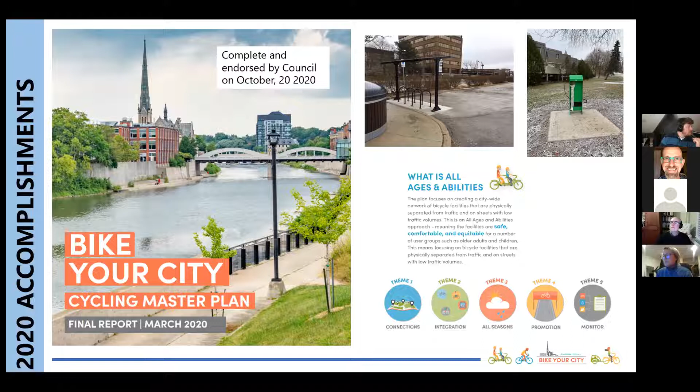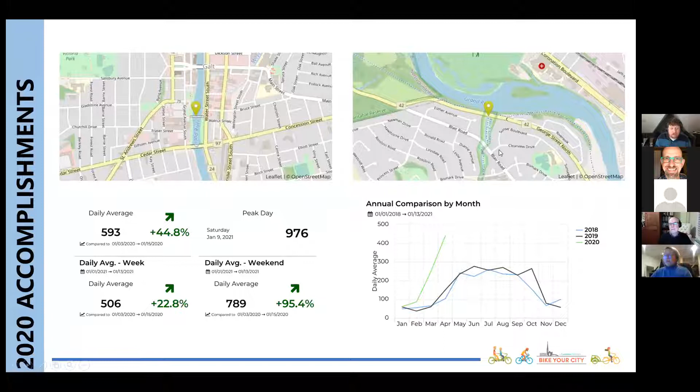And then along one of our trails that goes near the Blair area, this experienced a 400% increase, which is quite huge. And I'll hand it to Shane for this one.

Yeah, so I chose to highlight a couple of projects that deal with maintenance and safety issues we've had ongoing for a number of years. These are two trails that are heavily used in our network by both pedestrians and cyclists.

The top one here, the 401 underpass, is on the Mill Run Trail. It runs between the north end of the city in Hespeler and through to the Preston area in Riverside Park. It's a great trail - if you haven't used it, it's phenomenal. A number of years ago, Highway 401 was expanded and the section of trail was closed for a long time. We previously had a boardwalk through here, so anyone using this space would have to slow down, get off their bike and walk through.

When MTO widened the highway, they paved a little section underneath the 401, but of course you want to take it a lot faster now. So we had a real issue with this one. On bright sunny days, if you're coming along on your bike or running, getting underneath the overpass it's pitch black - you can't see anything, you're blind for a moment. We felt that was quite a safety issue.

So we looked at a few different options. We looked at putting lights under the bridge, but the MTO wasn't interested in paying for the electricity for that. Then we looked at whether we could put up some solar lights, but the problem is the worst darkness was actually in the middle of the day, so there's no chance for solar lights to charge their batteries. We were sort of out of options with that one.

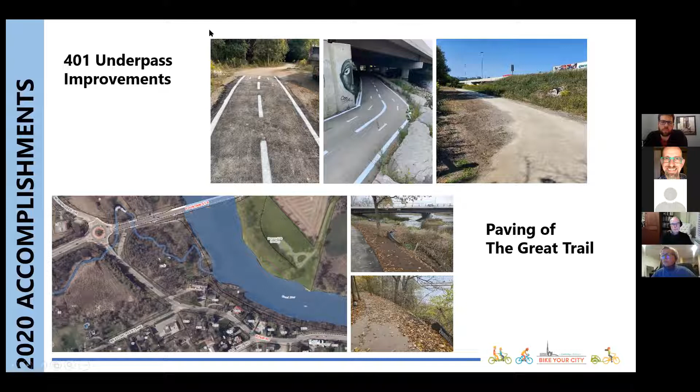Sorry, I lost myself there.

Phase one will be from Concession to Industrial, which we'll construct, and phase two is the section right after. Another trail we'll be working on is one in Hespeler.

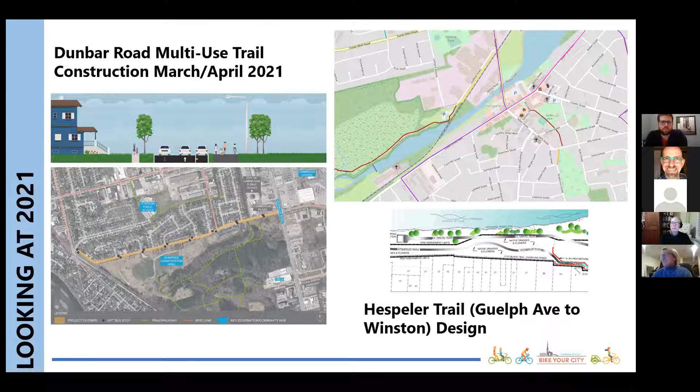This runs along Guelph Ave, behind through here along the river, then pops onto the road here, the Boulevard Multi-Use Trail, and ends on Winston Boulevard. The design work just started last week, we just had the kickoff meeting. That will be a fun project to look forward to for 2021 construction, either late 2021 or 2022.

Looking beyond 2021, we just finished up our cycling master plan. It's really great that it laid the entire foundation out for us, giving us a 5-year action plan. There's quite a few things in there we plan on doing. For example, we're updating our bicycle parking guidelines right now to include some indoor bike parking, working on a bunch of wayfinding signs, and working on a tourism loop throughout the city. There's quite a lot of things in our cycling master plan that we'll try to work towards in the next 5 years.

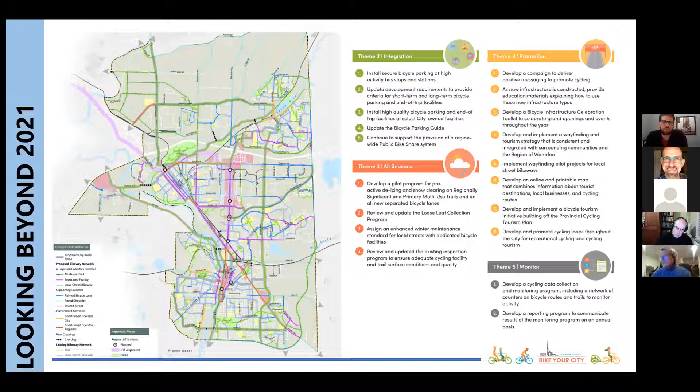It's amazing, with all this truck traffic and whatnot, you get into this space behind these industrial buildings and just feel like you're out of the city. There are raptors flying around, some wet areas down through there, lots of animals, deer and foxes and all kinds of stuff. It's just a fantastic little spot.

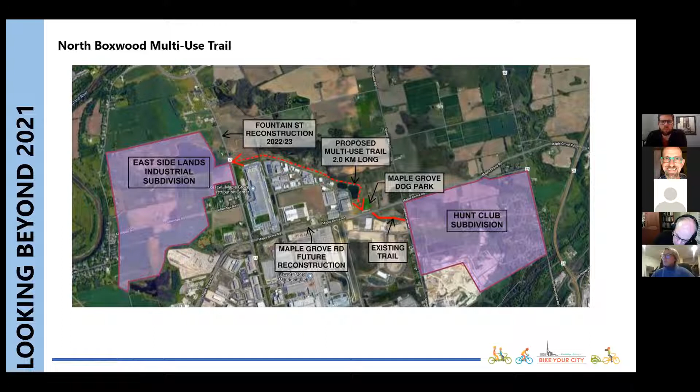We're looking at getting this planned this year, then starting construction next year, and hoping to tie in some pedestrian crossing points on Maple Grove and Fountain when the region does their road reconstructions as well. I'll move on to the next slide there, Lisa.

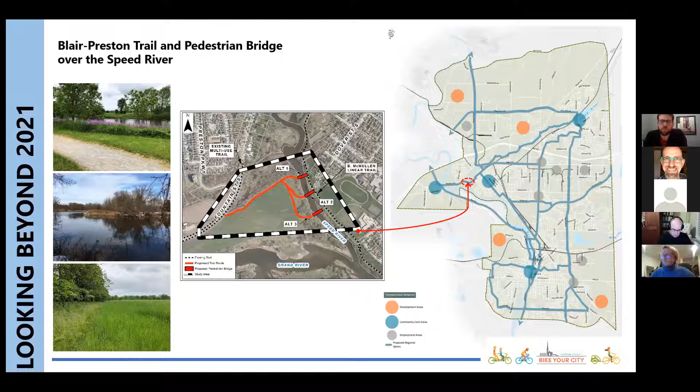That's the end of the— oh, sorry, I hit stop share by accident, but I didn't have anything else to add. That was the end of it.

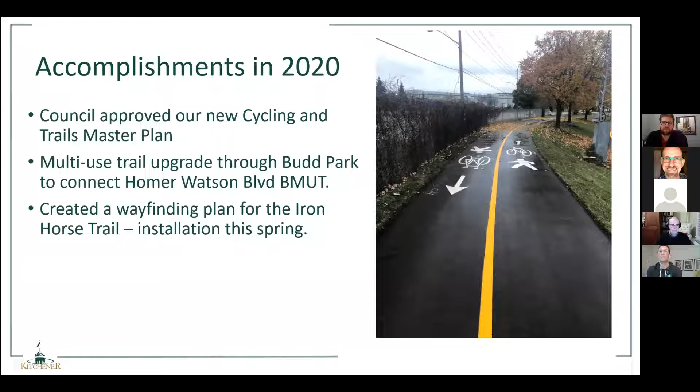So some of our accomplishments, I'm going to talk about off-road trails and Darren will talk about on-road. In 2020, our Cycling and Trails Master Plan was approved by Council. We created a new multi-use trail through Budd Park connecting the trail along Homer Watson, filling in that gap. And we created a wayfinding plan for the Iron Horse Trail, to be installed this spring.

Our Cycling and Trails Master Plan, we've been working on this for about 2 years now, and when COVID hit, it got put on hold with the rest of the world. So we finally got it approved, and I'll go through some of the highlights of that plan.

Some of our goals were to build more connections, to make the experience safe and high quality, and to create a culture of active living. Within that, we had 3 overarching themes: connections, experience, and culture. We broke the themes down into some strategies, which you can see on the screen and read more about on our website.

Connections focuses on connecting on-street cycling and off-street trails as a way of connecting neighborhoods, people, and destinations. We have the 3 C's: comfortable, connected, and complete. Comfortable focuses on developing our all ages and abilities network. Connected includes our City Spine network that provides a high quality, direct connection to major destinations like commercial areas, parks, and schools. The plan is complete by ensuring most residents of Kitchener are within a 400-meter designated cycling route or trail.

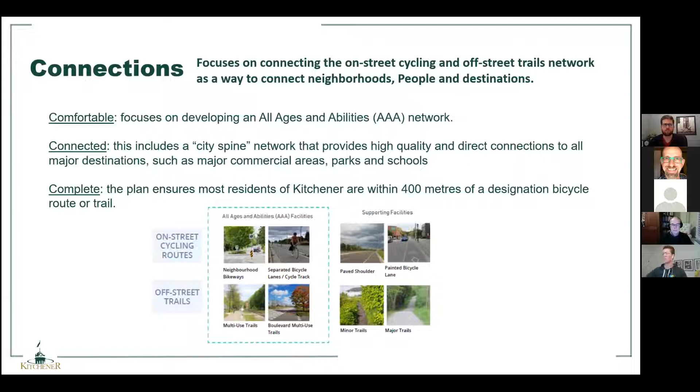Experience focuses on a safe and high quality experience that connects you through cycling routes and trails as stress-free and seamless as possible. This includes high quality bike parking, implementing service standards for maintenance and an inspection program, implementing the wayfinding strategy, continuing to update the network map, and ensuring new development elements are designed to accommodate walking, rolling, and cycling.

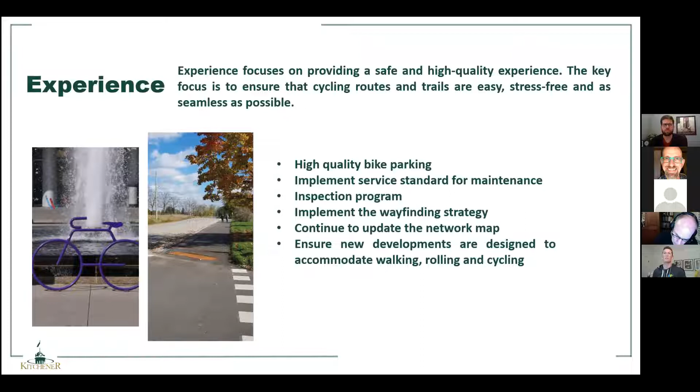Culture is about creating a culture of active living, through education and raising awareness for cycling routes and trails. We want to educate all road users on new cycling and trail infrastructure, encourage use of cycling routes and trails, and develop a data collection and monitoring program.

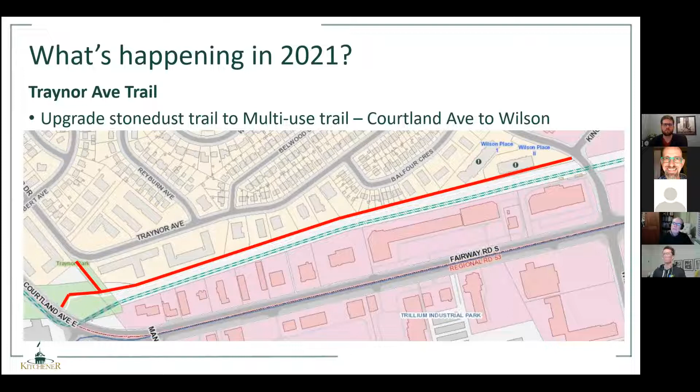So what's happening in 2021: we're going to upgrade the Traynor Ave Trail, which runs from Courtland to Wilson along the LRT tracks. We're upgrading the Stone Dust Trail to a multi-use trail with year-round maintenance. The Walter Bean Trail is currently designated as a hiking trail, and we're working with a consultant to fix it and upgrade it.

I can't tell you exactly what the surface will be since that's part of the design, but we're hoping it can withstand the ice flows that are damaging the trail right now. Construction is planned between 2022 and 2024.

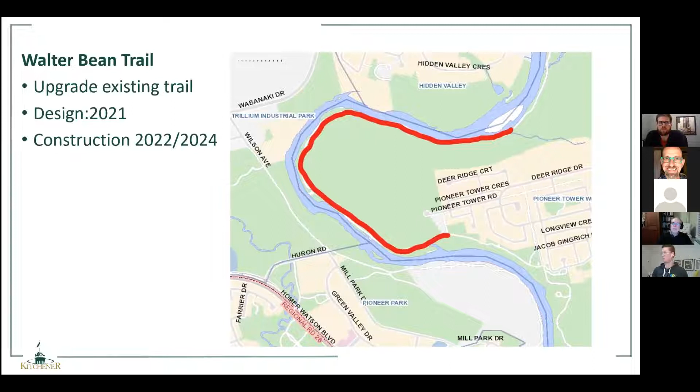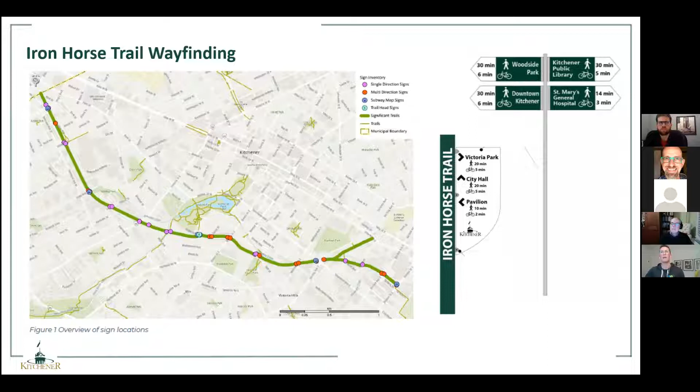We also created Iron Horse Trail wayfinding, starting from Union Street all the way to Ottawa. You can see what some of the signs will look like, with directional arrows in 2 different forms. We're very excited to get that going, and hoping to start installation this spring.

We also applied for stimulus funding. With that funding, we're looking at upgrading 2.7 kilometers of stone dust trails to multi-use trails. The trails slotted to get done are from Fischer-Hallman to Westmount, and Westmount to Lawrence, upgrading those to multi-use trails. And from Kingsway Drive down through Wilson Park to Vanier, we're looking at doing those as well.

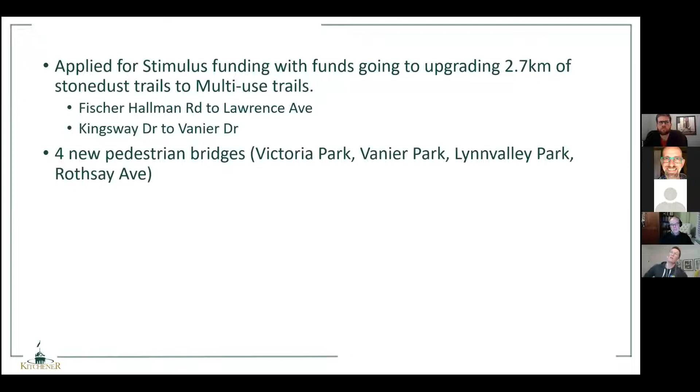We also have 4 new pedestrian bridges going in: replacing ones at Victoria Park, Vanier Park, Lynnvalley Park, and a bridge at Rothsay that takes you from Rothsay Ave over to Victoria Street. And next coming up is...

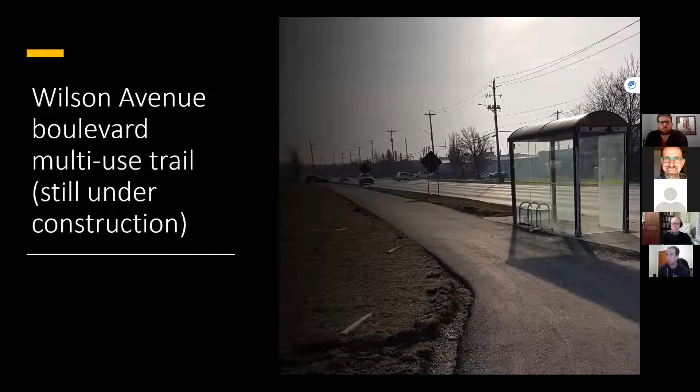Wilson Avenue Boulevard multi-use trail was also installed, kind of out in the suburb to the west of the city. It's a nice little connection that ties into the Ottawa Street multi-use trails that the region has, so it really helps to feed into that system.

If you've been down to Strasburg and Huron, you've seen our bright green paint for what we're calling a Dutch-inspired roundabout. It's not exactly how the Dutch would design it, but it is inspired by the Dutch. There's essentially a green strip of paint around the boulevard of the roundabout, and every leg of the roundabout has multi-use trails now, providing a nice designated space for cycling and separating pedestrians from cyclists around it too, which is nice.

You'll notice in those signs there's a bikes yield to cars sign. That's not our preference, but we aren't legally able to provide a cross ride through an intersection with a pedestrian crossover. That's a piece that, if you're thinking about some provincial advocacy, would be a great thing to do. It doesn't look like that's going to be changing anytime soon, so for now it will be bikes yield to cars, but whenever that legislation changes, we would be looking to convert that to a cross ride, which would grant the legal right of way to cyclists crossing there.

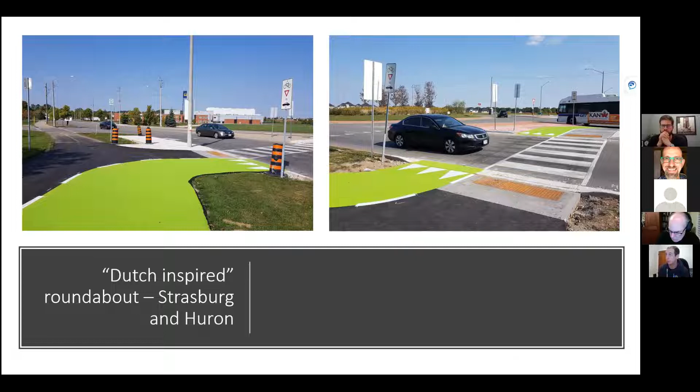We installed 2 new secure bike parking facilities downtown, Kitchener Market and Duke and Ontario. To me, the Kitchener Market one is kind of a game changer because we really didn't have any secure bike parking on the east end of downtown.

So between our 5 facilities, we've really started to cover off the downtown, and we are expecting to have the King Victoria Transit Hub have secure bike parking, likely integrated with our system. So then you have 6 really spanning the whole downtown. We're really excited about that because we do hear quite regularly that bike theft is one of the deterrents for going downtown, and we think this is a nice solution. So if you haven't signed up for secure bike parking, do check out our website, bikekitchener.ca, and you can sign up for a pass there.

And then the biggest and most significant piece was the Kitchener Downtown Cycling Grid. As you've seen, there's lots of construction happening downtown right now. We're expecting 5,000 new residents. This downtown cycling grid is really that missing piece in our transportation network downtown, the LRT obviously being a huge component. It's a pretty walkable downtown already, but we don't have that safe cycling network. We're hoping that with all these new residents coming downtown, they'll choose not to bring a car because they have such a great cycling or transportation choice.

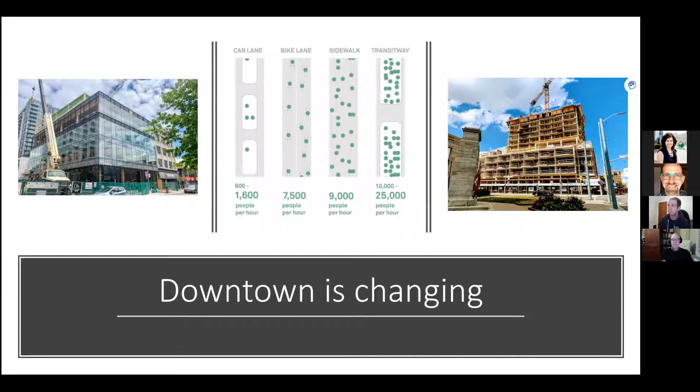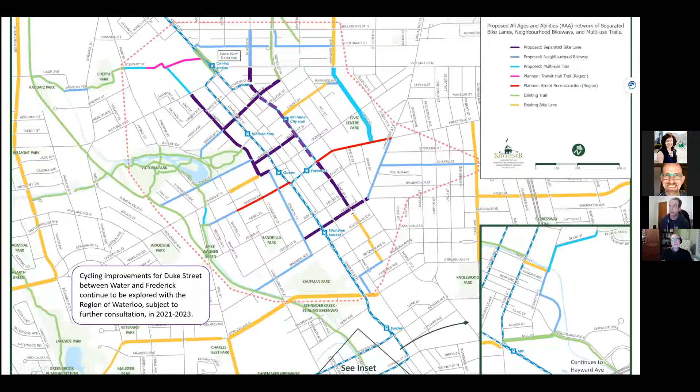So this is what the bike lanes will look like. They're bi-directional on one side of the street. Where we can, we fit in some on-street bike parking as well. Those are intended to eventually become bike share stations, essentially creating the capacity for that to happen in the future.

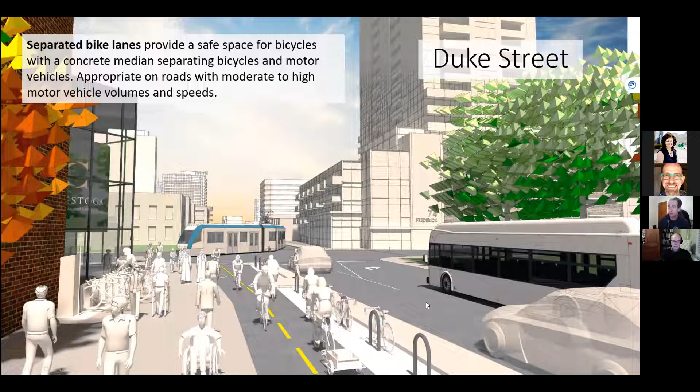Neighborhood bikeways, as I mentioned, are quiet local streets. They don't have designated facilities for cycling, but if they don't hit specific volume or speed thresholds, then we do what we can to get those volumes and speeds down. So things like diverters that force cars to take a specific turn, and that essentially reduces all cut-through traffic, so only people that live on that street would be there. We'll have a few of those different treatments happening as well.

It is a 3-year phasing approach. It's a pretty significant capital project, the most we've ever spent on a single cycling project before. And so we did need to phase that out over 3 years.

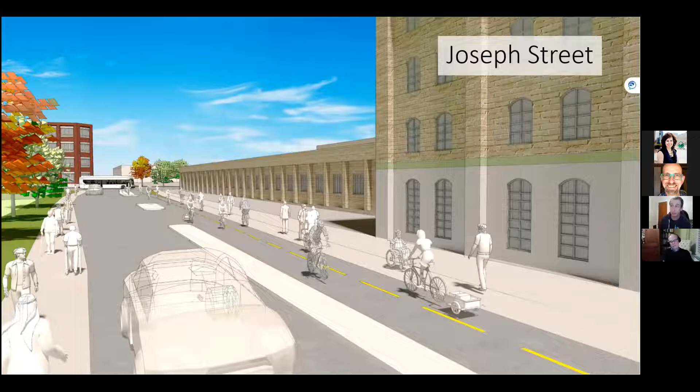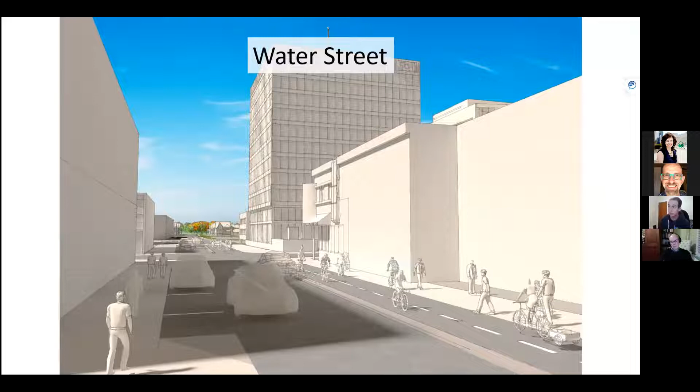So to let you know what's coming in this coming construction season, hopefully starting in May: the entire leg of Joseph Street, Water Street - which is really exciting because it connects into Victoria Park and the Iron Horse Trail - and at the other end, Spurline Trail connection going along Weber Street as well. Cedar Street will also be this summer, and that connects us right directly into an LRT station. We're excited about making that connection.

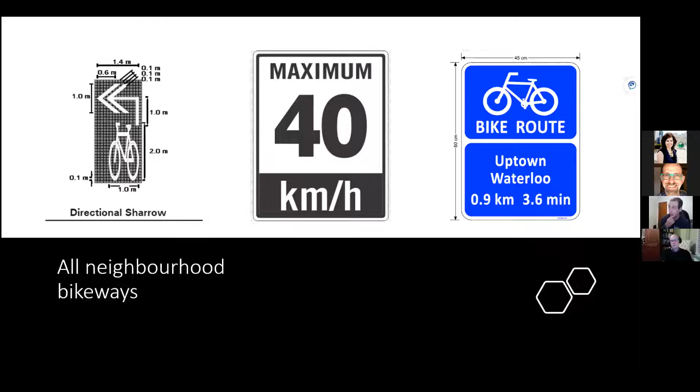And then pretty much all of those neighborhood bikeways that I mentioned and shown on the map will be installed this summer as well. So the main features of a neighborhood bikeway are those traffic diversion elements, and also things like directional sharrows. We still will use sharrows - the reason we use sharrows on quiet streets is for wayfinding, and they also come with a 40-kilometer speed limit, so it's worth having the sharrows there, so you get that reduced speed limit. We'd also have some enhanced wayfinding signage to really make it clear that this is a route for cycling.

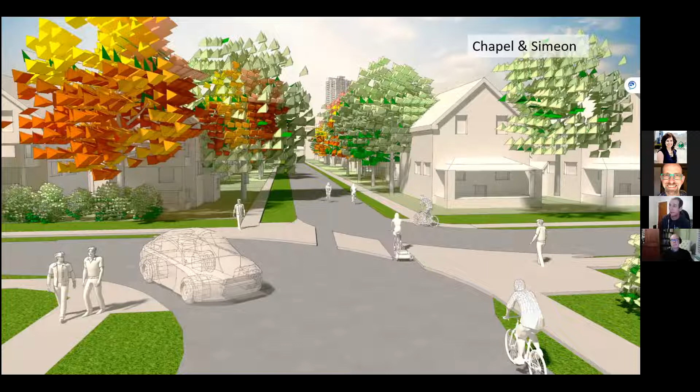That would include Lancaster Street, so we'll have some traffic diversion there. If you're used to driving on Lancaster Street, expect some big changes - you won't be able to access it from Krug Street. Chapel Street will also be a neighborhood bikeway that will see this traffic diversion. So if you live in the Central Frederick neighborhood, there'll be some changes to your traffic patterns, but the good news is pretty much all cut-through traffic through Central Frederick will be eliminated.

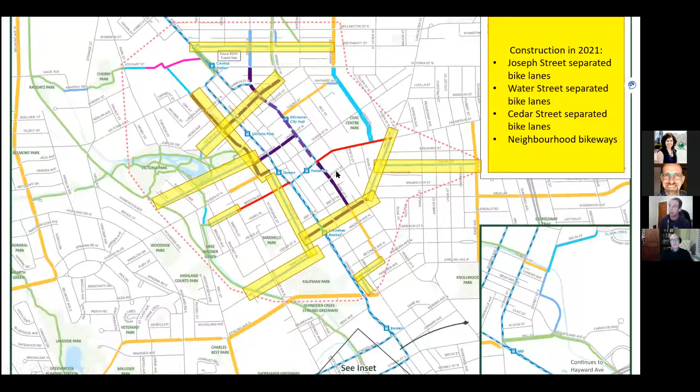So you may see some engagement coming this year on the Duke Street piece, as well as Ontario Street between King and Duke, just a single block. We needed to do some further engagement with the businesses there because they were concerned about the proposal we had.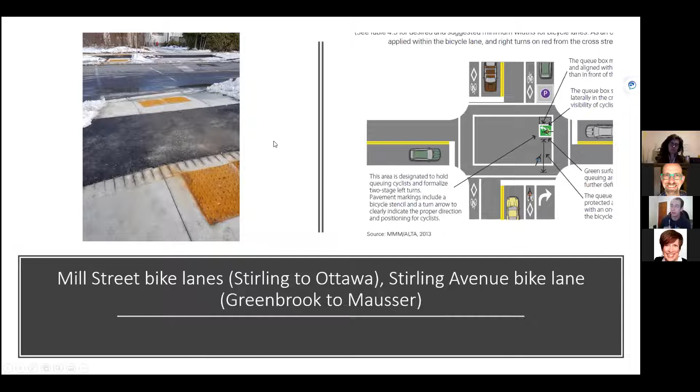The city is also looking at developing a Vision Zero strategy. We had some consultations later last fall, and there'll probably be another phase of consultations this year. We're hoping to get that to council late fall of this year.

If you aren't already riding on Queens Belmont separated bike lanes, please do take a look at those - they are being winter maintained. We are continuing to collect data on those and are expecting to report back to council at the end of this year. We're really hoping for some continuing growth - so far our numbers are growing, but they are starting at a pretty low spot. So the total volume doesn't seem really exciting yet, but certainly the percentages are looking great, and if we continue to see that growth, I think we're in a good spot for those.

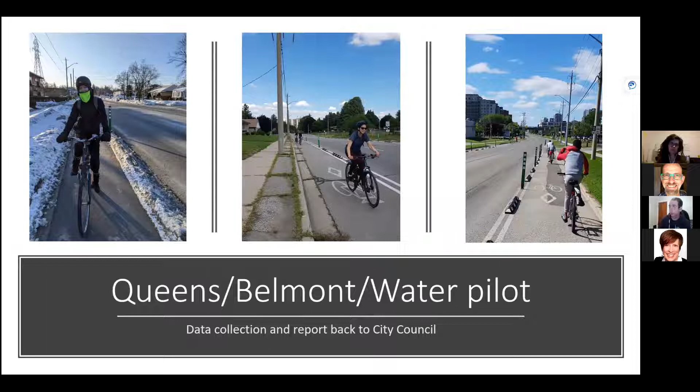So I'll end it there, and I'll pass back the hosting to David.

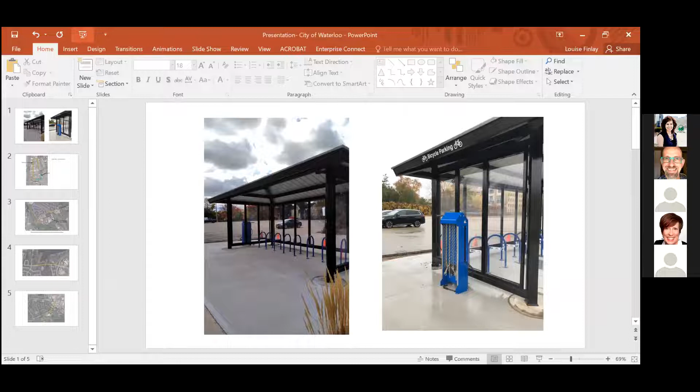My name is Louise Finlay, and I'm a project manager with the City of Waterloo. I'm joined tonight with my manager, which I'd have to say is maybe one of our first major accomplishments for 2020, was Chris being the appropriate candidate for the manager's position, which had been vacant since Phil Hewitson left. Chris was backfilling that job for almost a year, and then he was able to get that.

One of our first accomplishments for the City of Waterloo, I would say, is the bike shelter that was constructed at the Willis Way Ion Station. This is one of our first covered shelters. What's pretty unique is that we took over 2 parking stalls where there was a tree and kind of a weird grass area. We cleared all of that out, put the concrete slab in, and put this shelter in. It holds 16 bikes, and we have a fix-it station with an air pump at this facility as well. So if you've gone uptown and seen it, that's great.

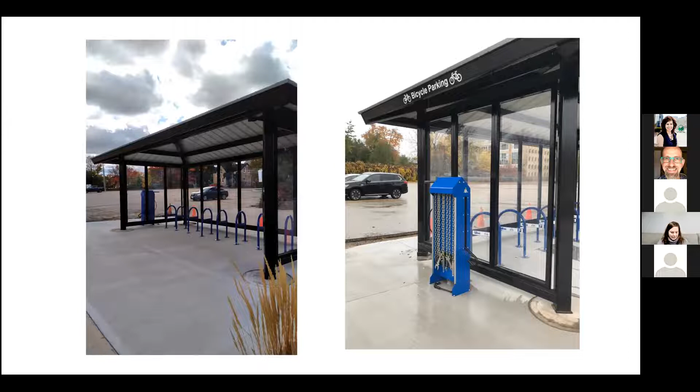The next section that we feel is pretty amazing is up in our industrial area. Through our annual contract, we receive funding every year to do infill sidewalks and multi-use paths. Multi-use path is a new term that the City of Waterloo is using from our transportation master plan, so we're trying to use that terminology more frequently.

The multi-use path has made the full connection around Colby Drive now, from Northfield all the way around to Wyman. That's the orange line you see on there, all multi-use path. We started this section off in 2018 with a sidewalk coming around, but now we've made that lovely connection with multi-use trail. We will continue the multi-use trail going south down Conestoga and out to King Street. There's a section of trail that we will be linking that to, so you'll see that coming this year or next, I believe.

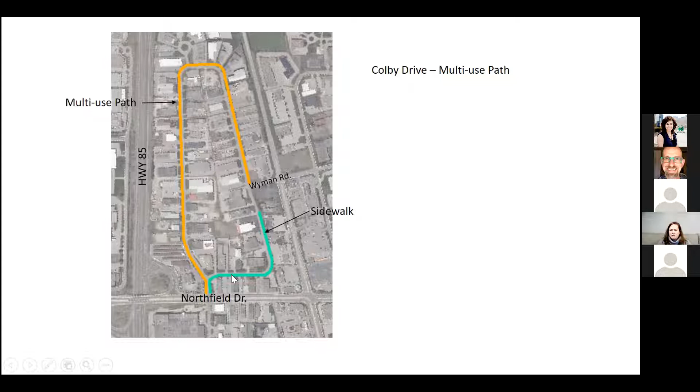In addition, another major accomplishment this year was changing the sidewalk on Lexington to a multi-use trail. So our Forwell trail now continues along. You can get off at Lexington, and this is a great connection all the way across to Davenport. Obviously if you continue on Lexington you'd be on road, but that goes all the way out to University. This was a piece missing that we did over the 85 highway 3 years ago, and this was the last piece of this connection to make it back down to the Forwell trail.

In addition, we also updated our cycling map. That was another accomplishment, and it is available online as well.

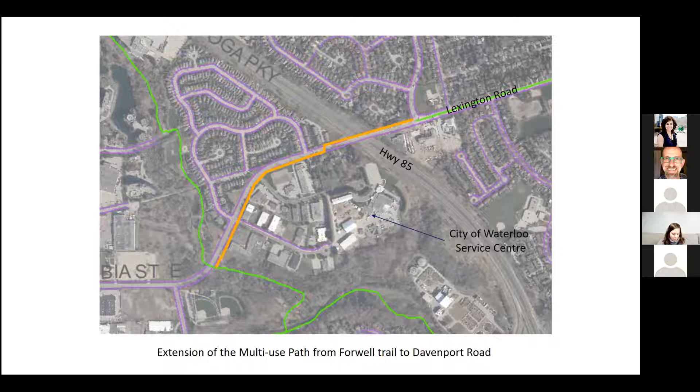For 2021, what we are hoping to achieve, we've got some major projects coming through. The first one, Farmers Market Phase 2. Farmers Market Phase 1 is a joint venture between the Region of Waterloo, Township of Woolwich, and the City of Waterloo, going from Northfield all the way up to the St. Jacobs Farmers Market - I don't want to speak to that since it's one of the region's projects. But Phase 2 of the project is from Northfield all the way down to Behringer, which connects to an existing multi-use trail. We call this Farmers Market Phase 2. This has gone through design and consultation, and we are excited to announce that we will be going ahead with construction of this multi-use trail this year.

We do hope to light these trails as well. That is something we've found from our transportation master plan, that we need to do.

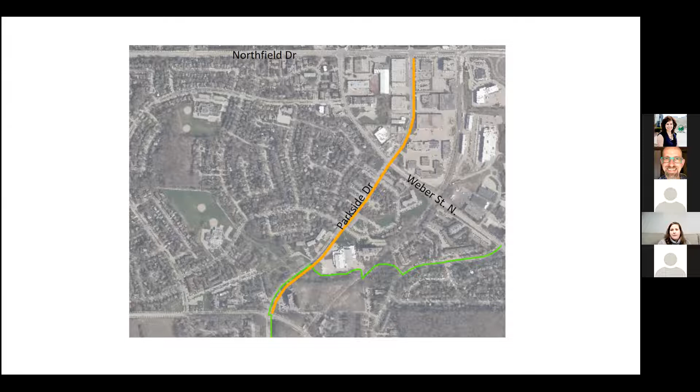In addition, there is the Laurelwood multi-use trail. This will run on the north side of Laurelwood between Fisher Hallman and Beaver Creek Road, so it's adjacent to the GRCA lands. This too will be lit and winter maintained along this section. This is just the first start of a connecting loop that we will do around the GRCA land. It will go up Beaver Creek to conservation, then down, and we'll connect to the Westmount multi-use path there. We'll be making those connections as the year continues on.

In addition, I don't have an image of this, so I do apologize. Phillip Street connection.

This is a connection at the Ion Station. We're proposing a multi-use path between Albert Street and Columbia, and it will be on the opposite side to the Ion Station, but it'll be a multi-use path that goes all the way along, and then that can connect you to the Ion Station at the R+T Park.

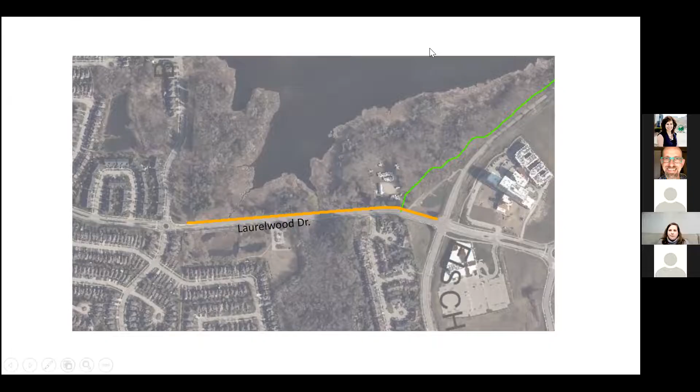Further out, there will be the implementation of the Transportation Master Plan, and I'm going to give a little plug here right now. We are in the last stage of the Transportation Master Plan, and we are looking for some engagement that's on Engage Waterloo, just some feedback on that last stage. We have some things we're working on with the region and area municipalities. So I'm just going to leave that for Mike and for Cornell to speak to, and if there's anything missing, we'll chime in.

And Chris, did I miss any of that? Or did you want to chime in? You're good? Okay. And that's about it for us. Thanks so much, Louise.

So I think that's a great segue to Mike Henderson. I'm just trying to find you on my screen, Mike, so that I can hand over. I don't have a presentation, I'm a fairly late addition to this meeting.